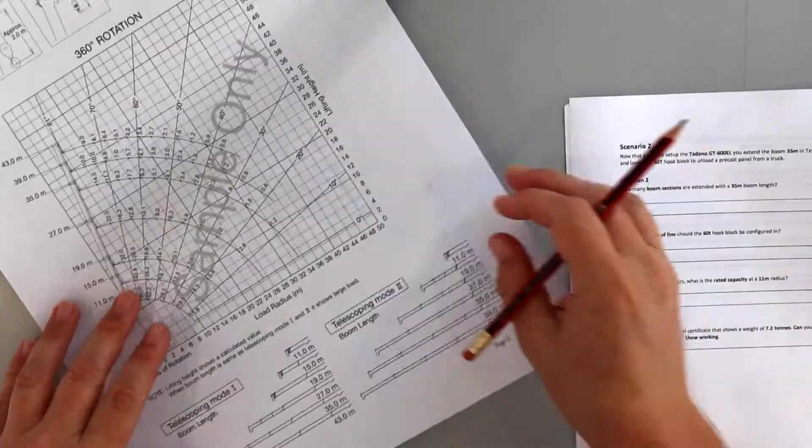What we're looking at here on the Tadano, if I come over to page 3, I'll just shift this up here. Okay, so I have boom extension information. Now, this crane has two different telescoping modes - telescoping mode 1 and telescoping mode 2 - and then the different boom configurations available for those two modes.

Now, when we think about telescoping modes, the easiest way is they've basically tried using the same jib and the same jib sections to provide us with two different working capacities of the crane. What do I mean by that?

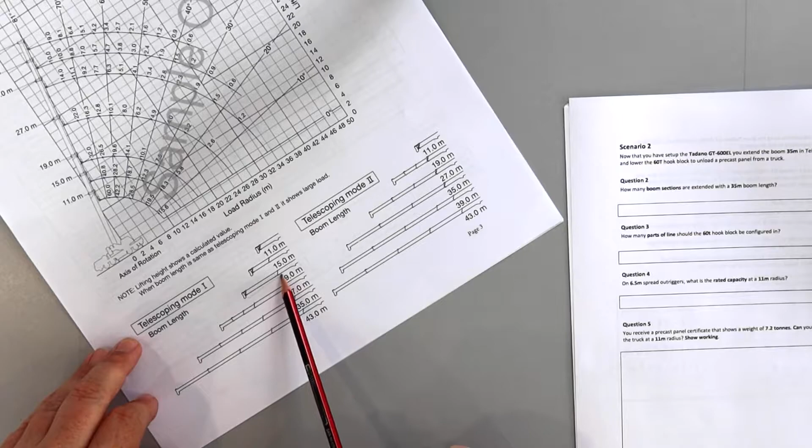Let's have a little look at the 19 metre radius chart, okay? In telescoping mode 1, the 19 metre boom only has one section extended. Now I know you can see two sections when you're looking at the paperwork here, but it's about extension. When the boom's packed away, you've got your section 1, or the butt section, that doesn't get extended - it's always there and houses the additional sections for the crane.

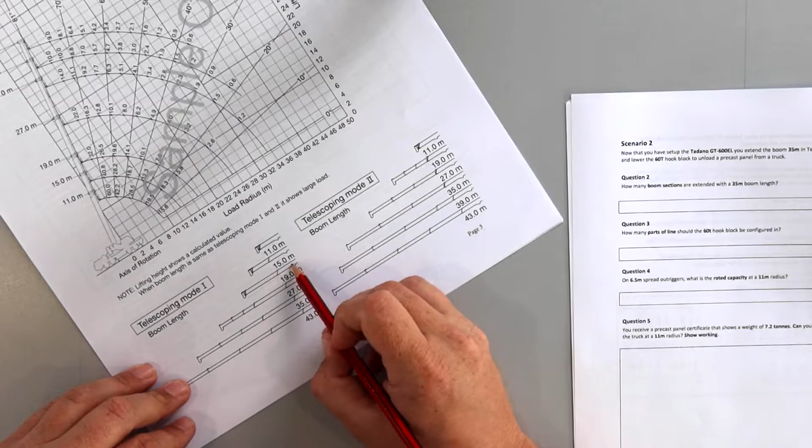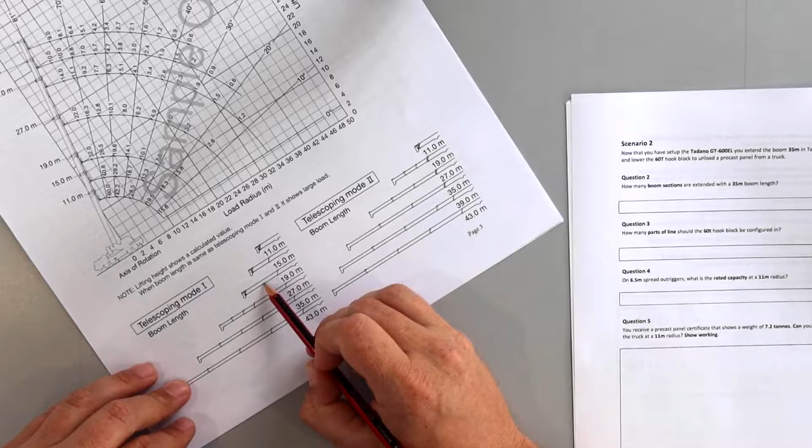So if I'm looking at this telescoping mode 1, 19 metres, we've only got one section extended. What does that mean? That means we've got all the other extensions still housed inside the boom, so you've actually got a lot of weight being pushed out, okay? So what that means is we've pushed out all of the sections, but they're all still inside section 2, so there's a lot of weight out there.

What that means though is it's very strong. So in close, that's going to be a lot stiffer and capable of lifting a lot more load. However, because there's so much weight pushed out, as we jib down and go for range, we're going to run out of steam really quick, and you'll find it's not good for very much further out.

Compare that to telescoping mode 2. Let's have a look at 19 metres. Here I've got 1, 2, 3 jib sections extended and one housed. So I've got my three end sections extended now - not my strongest one, but I've got my three lightest ones. What does that mean?

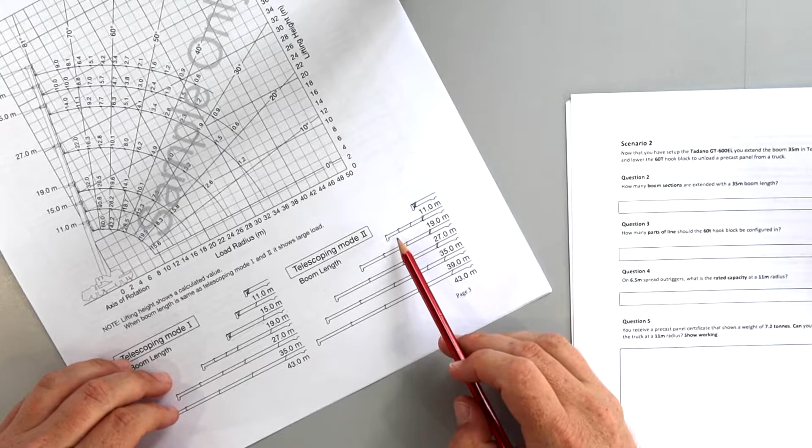In close, it's going to be flexible. You've got smaller jib sections that aren't designed to take the higher loads. So at radius, or at range, that's going to be much more effective than what we had when we had so much weight pushed out of our boom. That also means in close, it's going to be nowhere near as good as what we had in telescoping mode 1. So just to reference that back to the chart, we'll just have a really quick look.

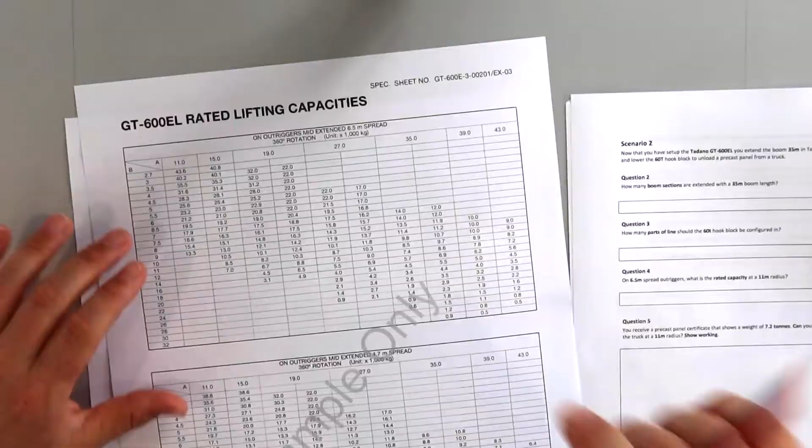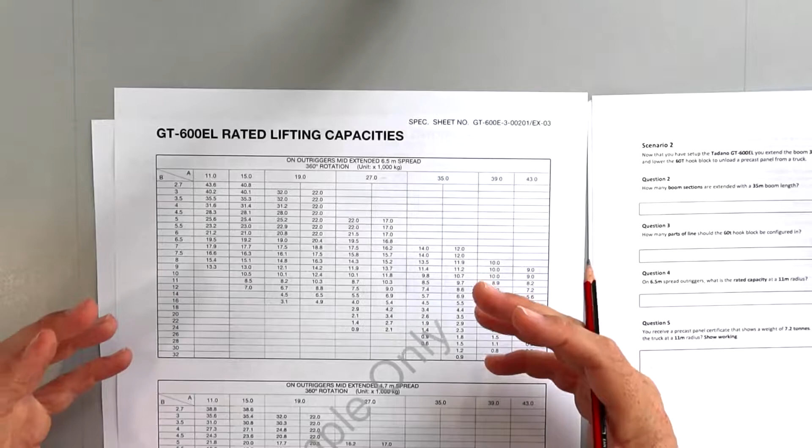Doesn't matter what outrigger extension is, we'll just have a look at this page here. So we'll just have a quick look. Here is my load chart. Up here was 6.5 metre spread on outriggers. So this is what I'm talking about - qualifying our chart. Always start at the top and work your way down. So here I've got on outriggers mid-extended, 6.5 metre spread, 360 degree rotation.

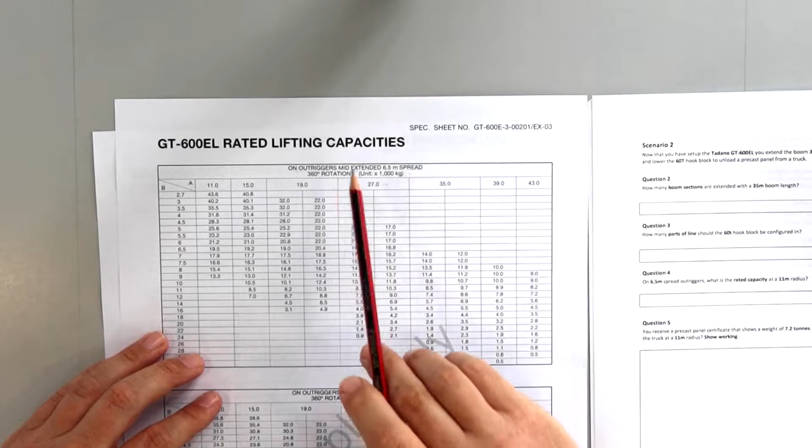The next chart down, on outriggers mid-extended with only a 4.7 metre spread, 360 degree rotation. Down the bottom, we'll just have a quick look here. We've got boom lengths and we've got all this information here, telescoping mode, number of parts of line. What is this table representing?

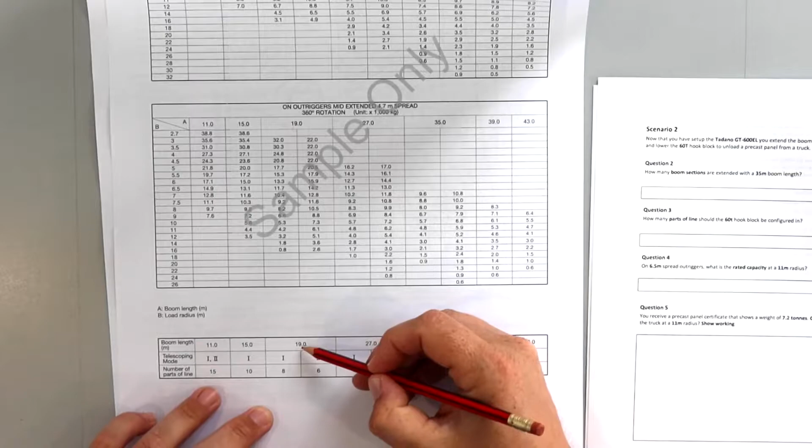You'll notice that these columns here line up. So 19 metres in telescoping mode 1 and telescoping mode 2, parts of line 8, parts of line 6. And if you see, they actually line perfectly up with the 19 metre section of this load chart.

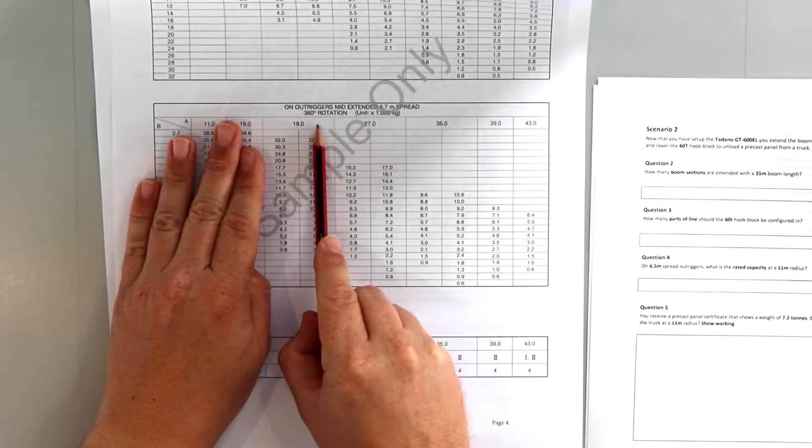As I was saying, when we talk about cranes, the two things that are going to limit you are line pull and structure. If you haven't got enough reeves on your block, you're just not going to be able to support the weight because the winch can't pull it up. On the other hand, you might have as many reeves as you need to do the lift, but if the crane's not structurally capable of supporting the load, it will either do one of two things, tip over or snap in half, and we don't want either of those things.

So come back to this. We're looking at 19 metre, we've got telescoping mode 1, telescoping mode 2. As I said, telescoping mode 1, we've got jib section 2 pushed out with 3, 4 and 5 still housed inside it. Really strong, a lot of steel in the air. When we look at the minimum radius here, it says that we can take that all the way up to 3 metres and we're good for 32 tonne.

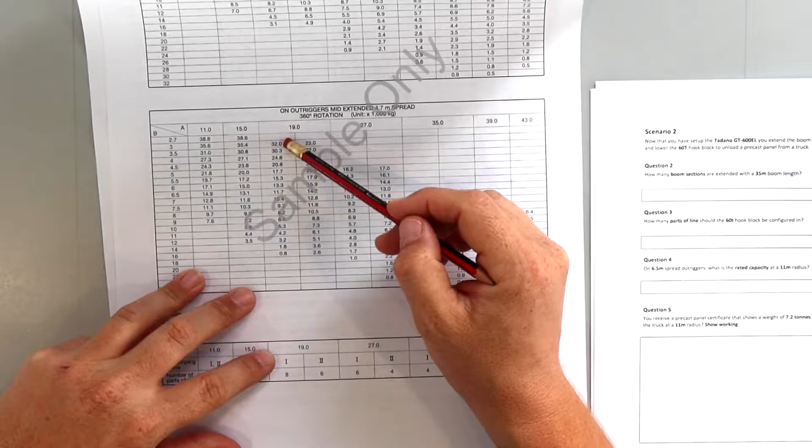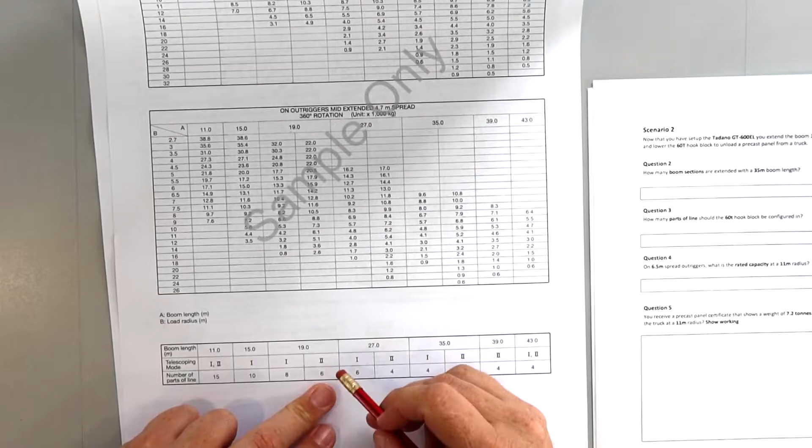To achieve that, we need 8 parts of line. Okay, so it's saying max load's 32. We can have up to 8 falls in our block, which will give us that maximum lift. But then we come across to telescoping mode 2. They're both 19 metre jib configurations, but this has got the other sections pushed out and is lighter. So at minimum radius of 3 metres in telescoping mode 2, we're only good for 22 tonne. Okay, that's a 10 tonne difference between the two.

And if you have a look here, telescoping mode 2 only says that we need to get a maximum of 6 falls of line. We can put 8, there's nothing stopping us, but there's no point going any further than 6 because A, it's going to slow our winch down, and B, we just don't need it because we're not going to lift anything more than 22 tonnes.

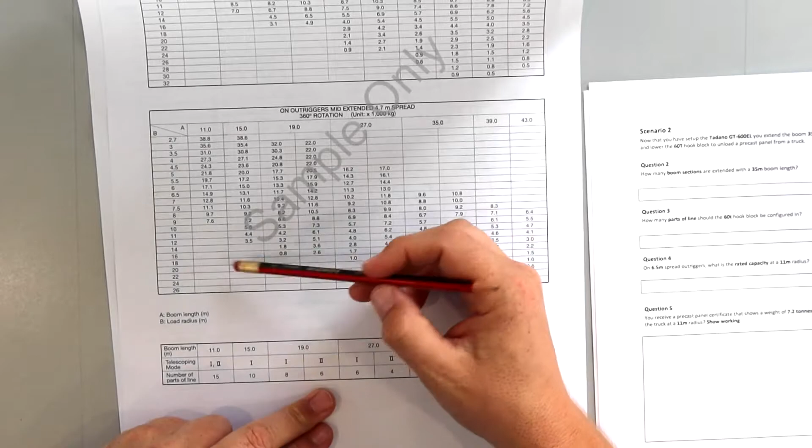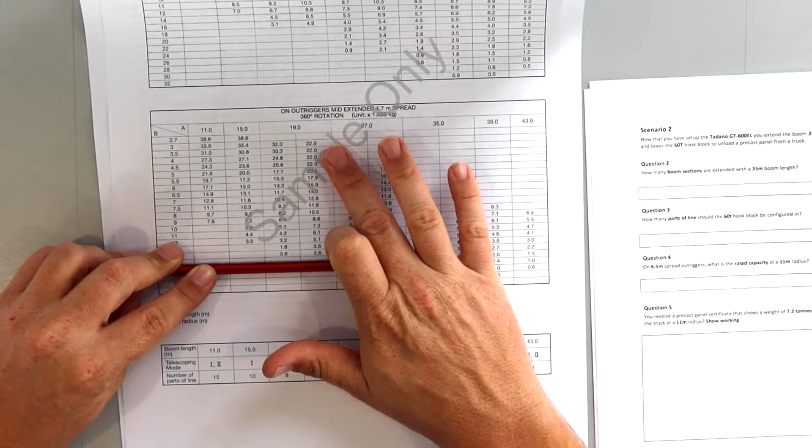The other side of that coin, come back down here to maximum radius, which with a 19 metre jib is, if we come across here, 16 metres. In telescoping mode 1, where we had more weight in the air, we're good for only 800 kilos or 0.8 of a tonne. Whereas if you look at telescoping mode 2, we're good for 2.6. So that's what that's all about.

We'll come back to the question now. It just says to us, how many boom sections are extended with a 35 metre boom length? Now, we needed to know which telescoping mode. This is where I start coming back to the scenario description and working out what's going on. So it says here I've got a 35 metre boom in telescoping mode 2.

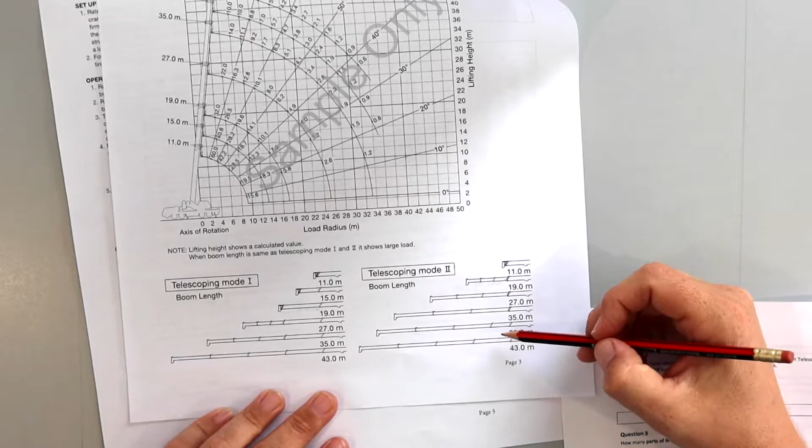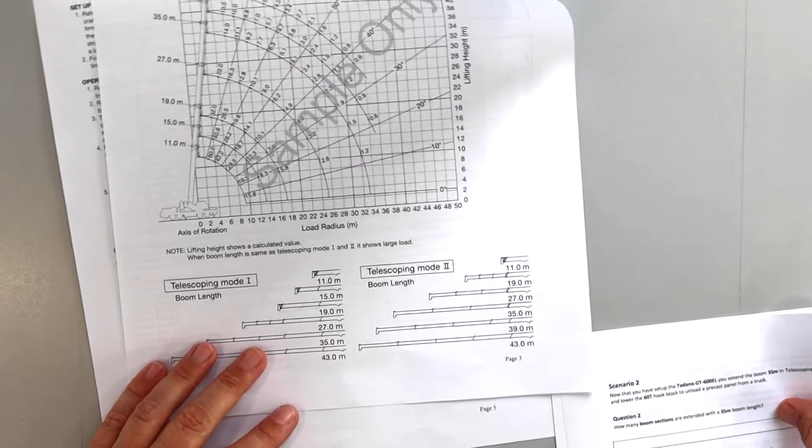So just turn the page back to page 3, where we had those diagrams. Okay, telescoping mode 2, we had a 35 metre jib going, and now we count. So the first one is a gimme because it's the butt section. Doesn't move, doesn't get extended. 1, 2, 3, 4. We have 4 jibs extended in 35 metre, telescoping mode 2. So the answer to question 2 is 4.

How many parts of line should the 60 tonne hook block be configured in? Really, it's only going to be configured to enough falls to get whatever you're lifting, the heaviest object on the day on site. In a real world scenario, you only reeve to your requirements. Okay, you pick out the heaviest load for the day, reeve it up accordingly, because every additional reeve that you put on there or additional fall, you're going to be cutting your speed and you'll just be way too slow.

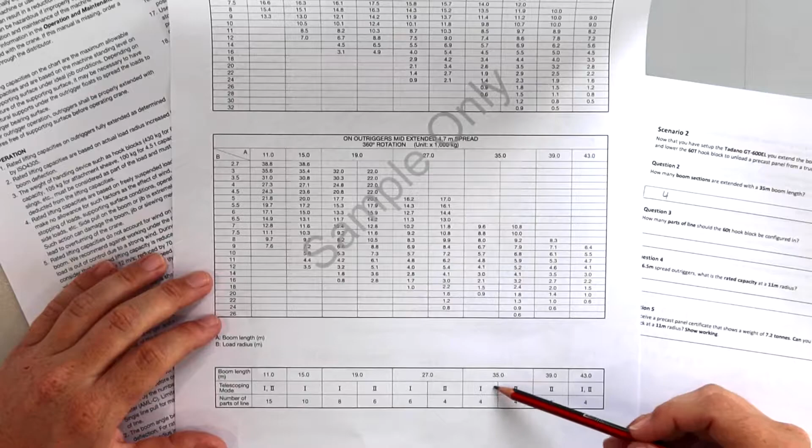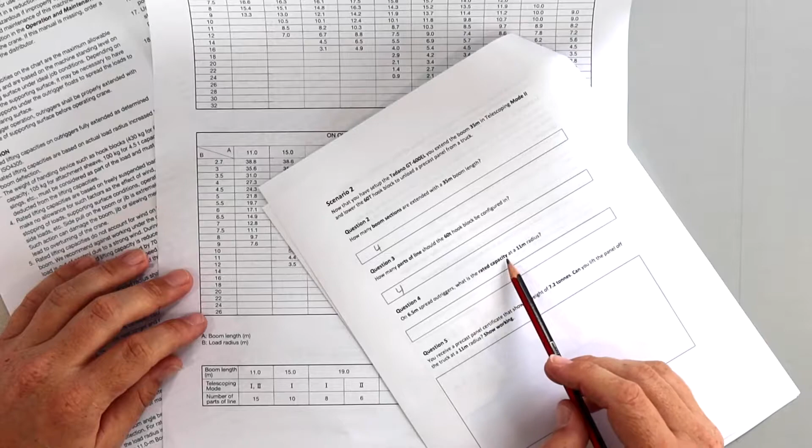But for the purposes of the question, how many parts of the line should the 60 tonne hook block be configured in? This is where we come back to that chart on page 4. Have a look here, we've got a boom length of 35 metres in telescoping mode 2. And it doesn't really matter because both telescoping mode 1 and 2 have the same answer. The answer is 4 falls. So how many parts of the line? 4. Okay, next question. On a 6.5 metre spread outriggers, what is the rated capacity at an 11 metre radius?

So if you remember back to the crane charts, capacity is different to safe working load. Capacity is purely what the crane can support. It has nothing to do with the deductions, and it's not actually what you can lift, because we haven't taken the deductions off. We haven't taken off the hook block, the rigging, shackles, spreader bars, whatever's involved in that lift. We're just purely looking at capacity, which is what these charts give us.

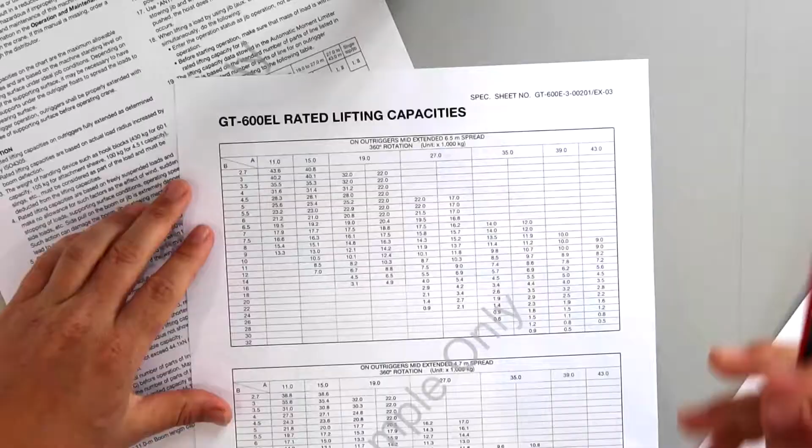So we're still on the top of page 4. Let's have a look here. We're going to qualify our chart first. On outriggers, 6.5 metre spread, check.

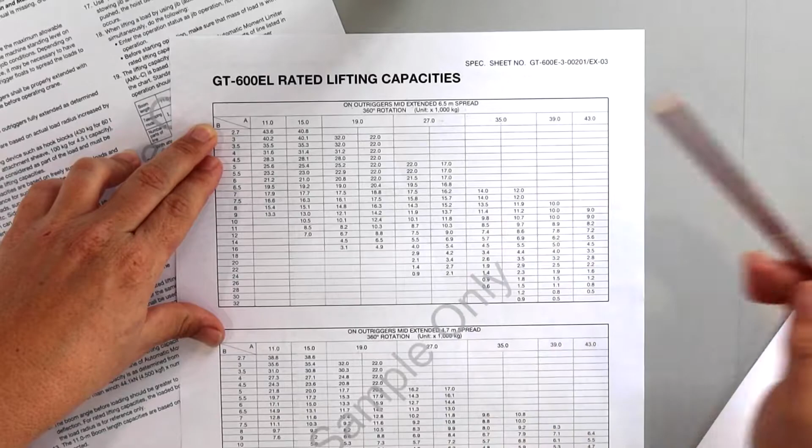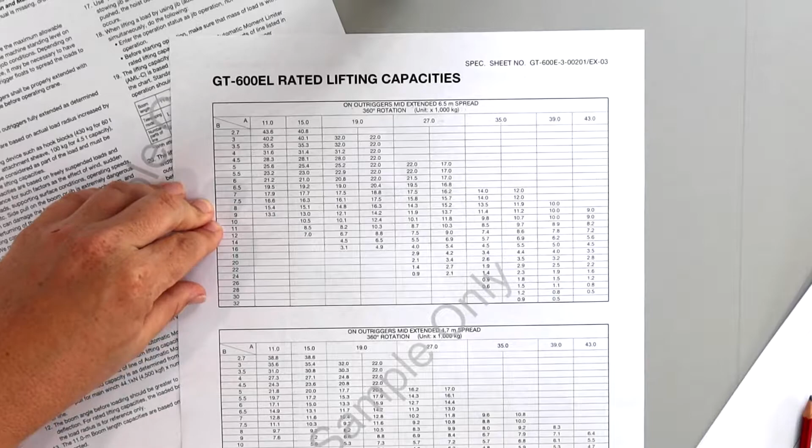The next thing, we look at boom length. So we knew we were in 35 metre, which is check. And then we look at telescoping mode 2, which is the right hand of the two. At 11 metres, it wants to know what we're good for. So you come down to 11, this is where we grab our blank piece of paper, bring it up to 11 metres, and as you can see right here, telescoping mode 2, 35 metre, we're looking at 6.9 tonne.

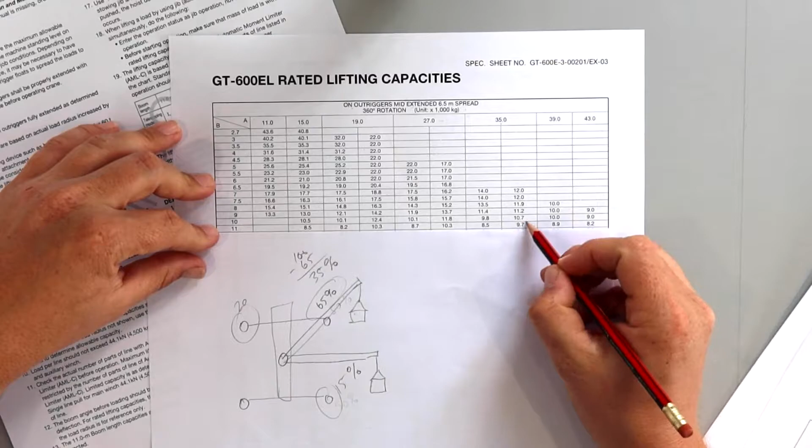It's a little bit easier because block weights are usually sub 1 tonne, unless we're dealing with big crawler cranes or over 100 tonne cranes. So it's usually easy with these things just to work in kilos. So 9.7 tonne is 9,700 kilos.

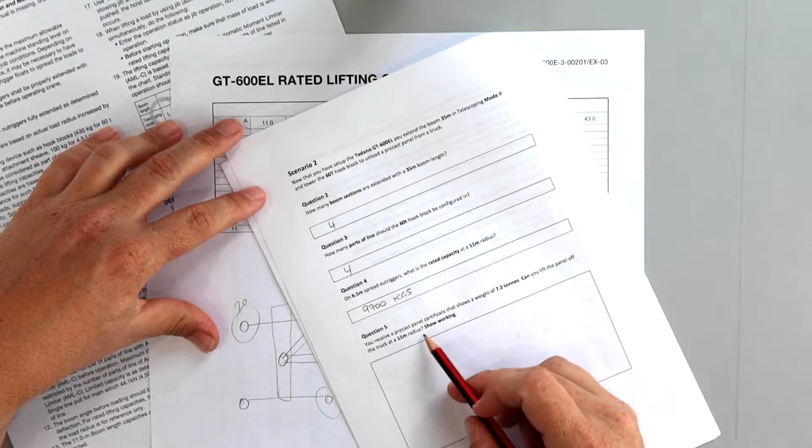Next question, you receive a precast panel certificate that shows a weight of 7.2 tonnes. Can you lift the panel off the truck at an 11 metre radius? Show our working. So this is where we take our capacity and then start taking off our deductions. We need to look and take into consideration hook blocks and rigging. Now, they haven't specified any rigging weights here for this particular question, which is unusual, but that's all right. We still need to look at our other deductions, which is our hook block. So it said up here at the top that we have a 60 tonne hook block. So now we need to find off our charts what our hook block is.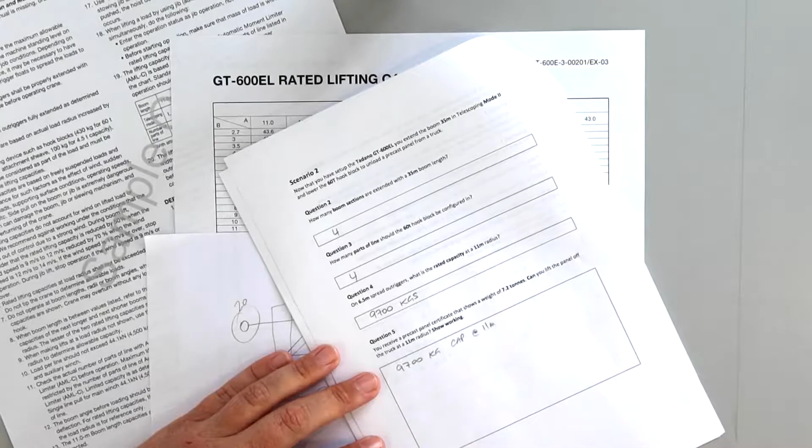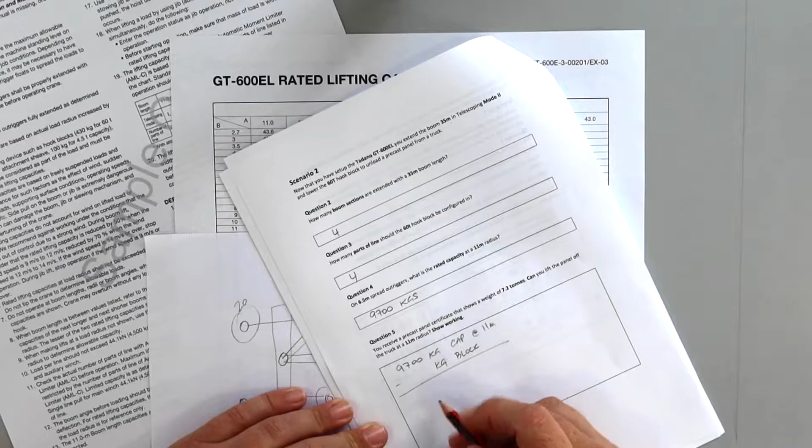Now, if you remember back, I also like to describe everything in this box here. So if we're starting with 9,700 kilograms, which was capacity, and usually I just put a little note at 11 metres or wherever reference I've got that off the chart so I can remember where and chase my numbers back. We need to minus off, and we don't know what the weight is yet because we haven't found it, but we're going to take our block. And then, because there's no rigging, we won't add it there, but whatever our capacity is minus our block is going to be what our safe working load will be at the time.

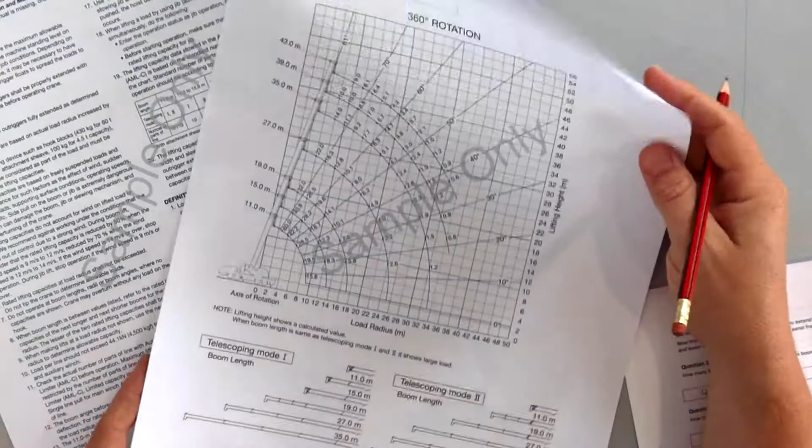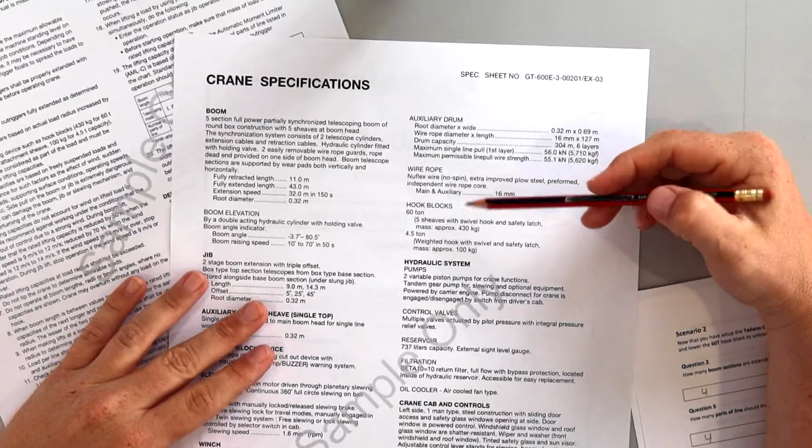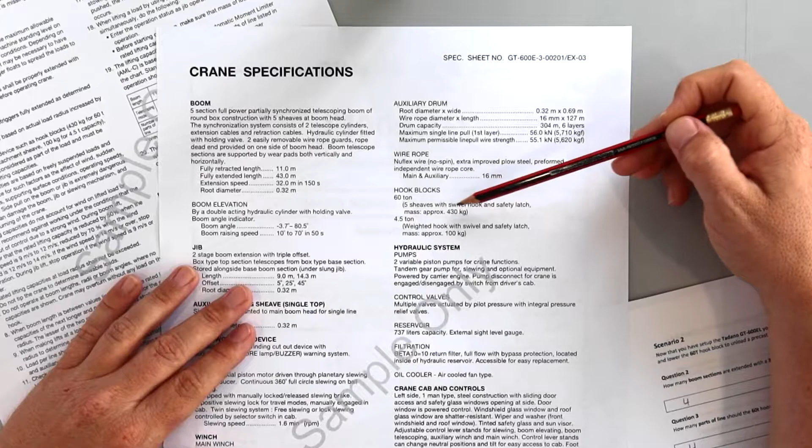So now page 4's got nothing on the blocks, page 3's got nothing on the blocks. If we go back to page 2, right here we have a specification on our blocks, and this is the crane specification sheet. Hook blocks 60 tonne, has 5 sheaves with a swivel hook and a safety latch, and the mass is approximately 430 kilos.

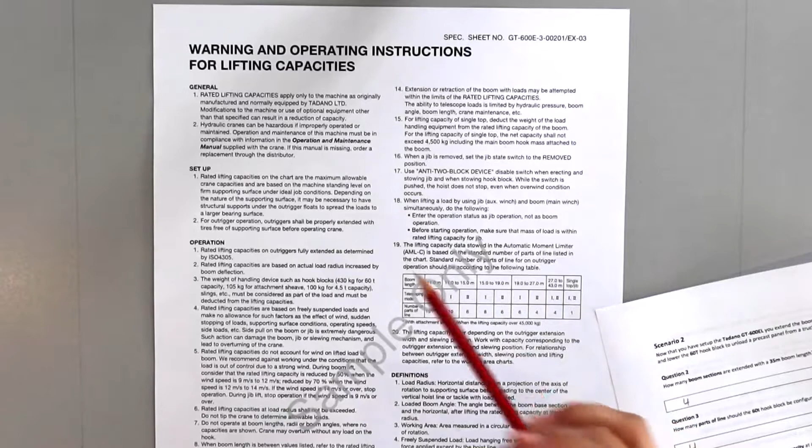I usually have it spec'd down here in the notes too. Yeah, so on page 5, warning and operating instructions for lifting capacities. There's all the notes, and this is where we're going to start to see things like rated wind speeds or maximum working wind velocities. You're going to see things like setups available. Can you work on reduced outrigger size? Does it have a rubber chart? Can you work on rubber? All that kind of information.

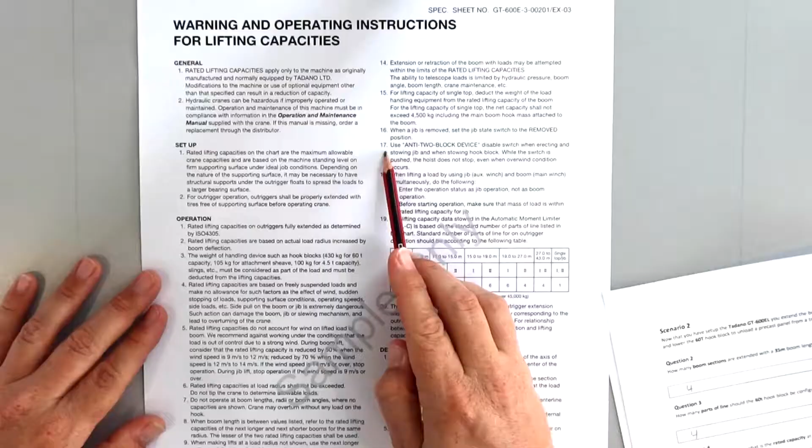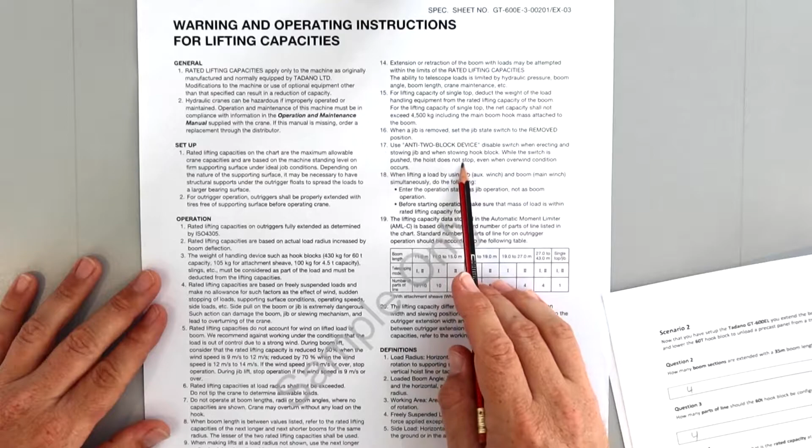And all the notes that you really need to know. For instance here, note 17 under operation, anti-2 block device, disable switch. Use that when erecting and stowing the jib and when stowing the hook block. While the switch is pushed, the hoist does not stop even when overwind condition occurs. So the second you need to use that key to get your blocks retracted, be aware as soon as that key's turned, those limit switches aren't going to work. Pretty obvious, but it's in the notes. It's information we need to know to operate the crane safely.

And if we just have a quick look here, operation note number 3, the weight of handling devices such as hook blocks, 430 kilos for 60 tonne, 105 kilos for attachment sheave, and 100 kilos for 4.5 capacity. Slings, etc. must be considered as part of the load and must be deducted from all lifting capacities.

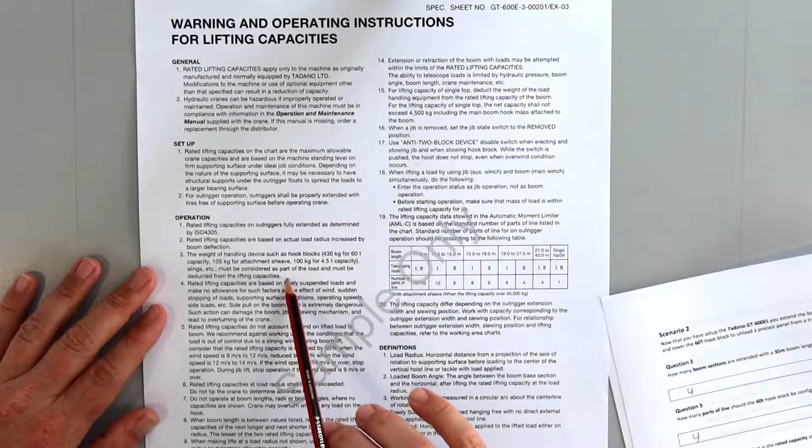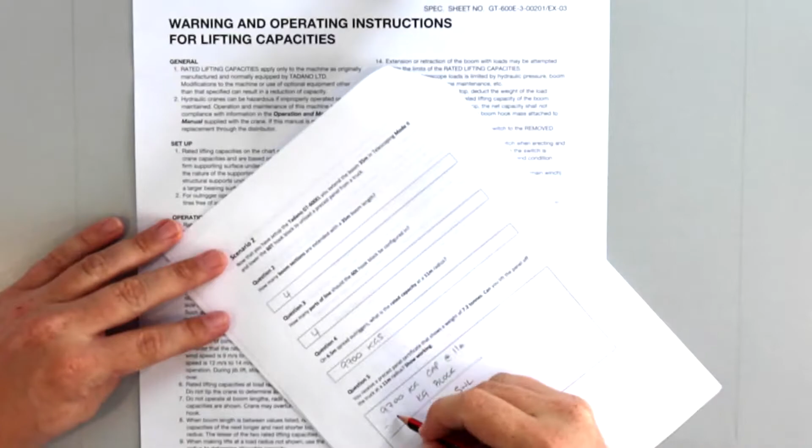So it's pretty clear. We come back to our notes and we were told, or we've worked out, that our 60 ton block was 430 kilos. So our safe working load is going to be 9700 minus 430 equals 9270 kilos. That is our safe working load, not our capacity. Our panel was only 7.2 tonne, so I'm going to write 7200 kilos is less than 9270 kilos. Yes, we can lift. And that's it.